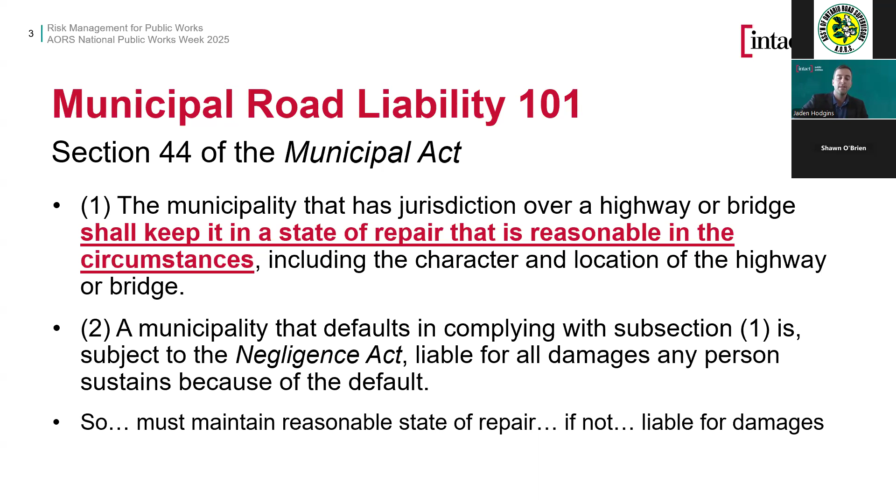So the next important item to address is what constitutes a reasonable state of repair. There's no simple definition - it depends on many factors. For a road, it depends on things like the location of the road, its history, its character, its traffic volume, whether it's paved or rural, its normal usage, and the resources available to the municipality. Additionally, when the courts are assessing whether a road is in a state of repair or not, they will look at all of the facts and evidence and information available in making that assessment and determination.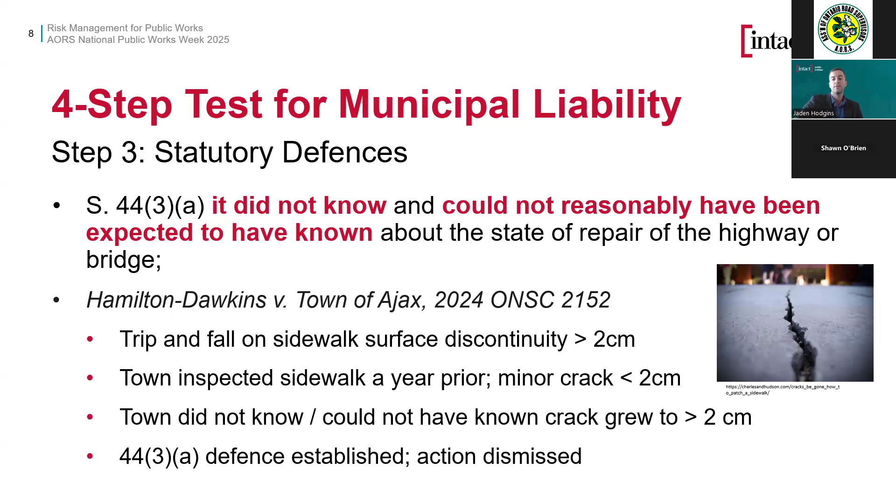They had done their annual inspection the year before and documented that it was in a state of repair, and they had not yet completed their annual inspections for this year. The trial judge agreed there was no evidence that showed the town knew or could reasonably have known about the trip ledge. Therefore, the trial judge confirmed the town established this defense and the action was dismissed.

Before moving on, just a couple other takeaways from this case. On the good side, the town of Ajax, they had an effective sidewalk inspection program.

Their supervisor of operations testified in court regarding the town's inspection procedure, explaining they hired summer students to walk all the sidewalks annually using GPS units, and the students would record 3 categories of surface discontinuities: 0 to 6, 6 to 19, and 19 millimeters. Any trip ledge greater than 19 millimeters was painted orange and logged for repair. So the sidewalk inspection program was generally adequate and provided the town with good records that they were able to use to defend the claim.

There were, however, a couple things the judge did not like. The first being that the town did not have a written policy for its sidewalk inspections, and they didn't have a written training program for its summer students. So this left the judge with some discomfort because the lack of policy and training program may suggest that the students may not have been doing the inspections properly.

The second thing is that following the trip and fall, the town went and repaired the sidewalk panel without documenting it, without taking photos. So the judge suggested that this effectively extinguished evidence that may have been used in litigation. But fortunately, given all of the factual circumstances, this was not significant and did not affect the outcome of the judge's decision.

And lastly, when considering the Section 44(3)(a) defense, the judge cautiously quoted another case which stated, 'A municipality should not readily benefit from its own failure to document or circulate complaints properly,' which means that a municipality cannot put its head in the sand or fail to document or ignore complaints. A complaint received means that the municipality has knowledge and therefore cannot rely on this defense.

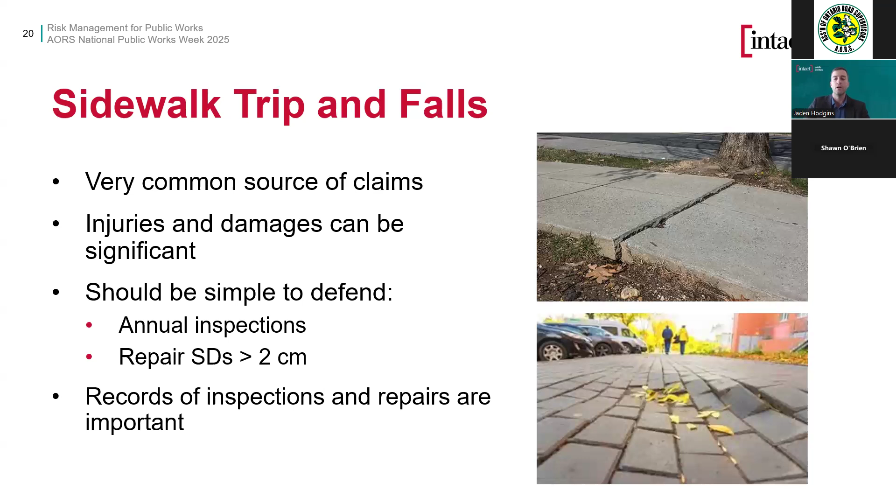We'll look at some applicable court cases dealing with these types of claims. First, a little bit of an older one, Bellefleur versus City of London. This happened back in October 2000, and the plaintiff was walking along the north shoulder of the street in the City of London. There were no sidewalks on the street, and the shoulder was routinely used by pedestrians. The plaintiff stepped into a large hole on the shoulder that was covered by autumn leaves, twisted her ankle, and fell. Damages for the injuries were agreed to be $12,000.

At this time in the year 2000, the MMS did not exist. However, the Municipal Act still had the other two defenses, being could not have reasonably known and took reasonable steps. Since the shoulder was commonly used by pedestrians due to there not being a sidewalk, the judge found that the standard of maintenance applicable to the shoulder approaches that of a sidewalk. So when considering state of non-repair, unfortunately, the city wasn't able to establish a defense, and they were found liable for having failed to maintain a reasonable system of inspection of the gravel shoulders.

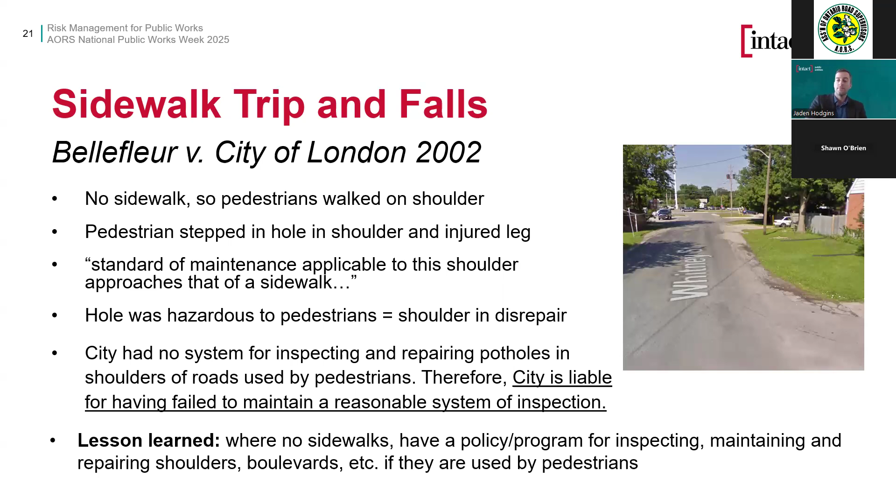The next case we're going to look at is Voisin versus County of Oxford, 2022. This case involves the trip and fall that occurred in the town of Otterville in Oxford County in August 2016. The main street running through this town was under construction, where 50 millimeters of surface course asphalt was milled out. The plaintiff was crossing the street at night when she tripped on the 50 millimeter milled edge, falling forward and breaking her arm. Damages for this case were agreed upon at $75,000.

The four-step test for liability was assessed. The first step is for the plaintiff to prove that the road was in a state of non-repair. There was a really detailed look from the plaintiff's legal counsel and the judge, examining all the facts including the construction contract, the Ontario Provincial Standards specifications, MMS, Ontario Traffic Manual Book 7, human factors evidence, and illumination. Ultimately, looking at all that information together, the judge concluded that the lack of ramping created a state of non-repair. In this case, they were not able to establish the defense.

In terms of contributory negligence, the plaintiff was assessed 35% contributory negligent due to the fact that she lived adjacent to the construction project, was aware of it, and should have been taking more care walking at night through the construction area. The county and contractor were found 65% at fault. Fortunately, the county had the proper insurance and indemnity clauses in its construction contract, so the contractor, or their insurer, was responsible for covering all costs associated with this.

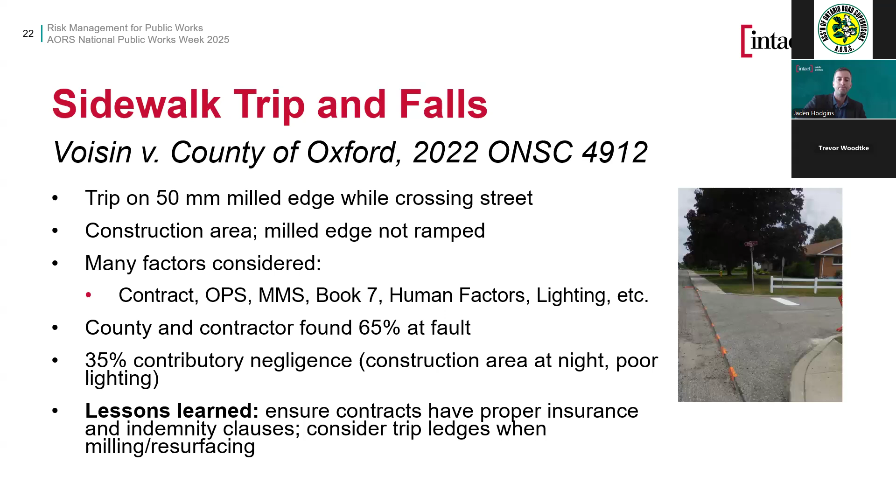One last one on sidewalk trip and falls. This one's an active claim, it's not gone to court. In this claim, the plaintiff allegedly fell forward over the sidewalk surface discontinuity, hit their head on the concrete sidewalk, temporarily losing consciousness. In the action they brought against the municipality, they're suing for $1.1 million.

Concussion, post-concussion symptoms, and psychological injuries can lead to these higher costs. The surface discontinuity was measured in 3 locations and ranged from 5 centimeters to 2.1 centimeters, so all exceeding the MMS threshold.

This one's unfortunate because the municipality had completed its annual sidewalk inspection per the MMS. They observed the surface discontinuity to exceed the 2 centimeter threshold. However, it was not repaired, so something fell through the cracks.

The lessons learned or takeaways from this claim are: one, that trip and fall claims can be significant, especially when head injuries occur. And two, you must follow up and ensure that your repairs are completed following inspections. Obviously, something went wrong in this case. Maybe there was a breakdown in the procedure between inspections and repairs.

So you need to review your whole sidewalk inspection program, from training to inspections to repairs, and ensure that it's working as intended. Lastly, spray paint surface discontinuities as soon as you become aware of them. Section 16.1, subsection 4 of the MMS says that treating a surface discontinuity includes alerting users' attention to the discontinuity, which can help reduce liability as well.

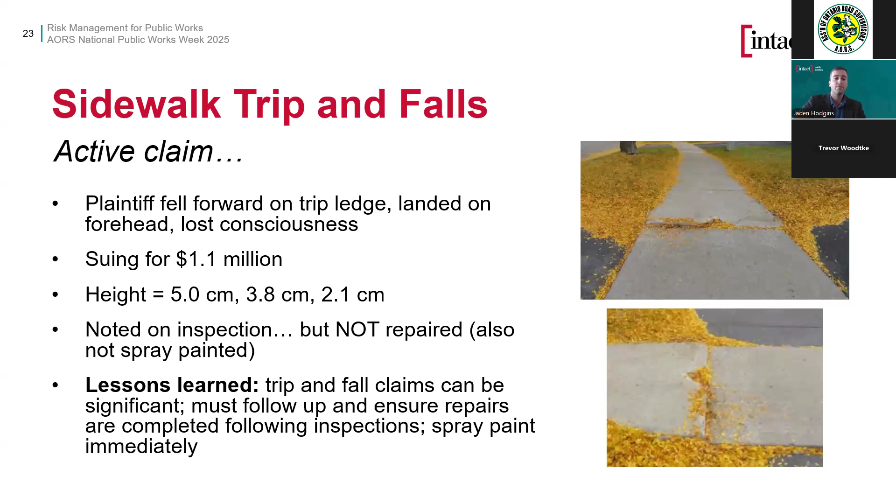Just a list of some takeaways on sidewalk trip and falls now. Firstly, by having a well-documented program of sidewalk inspection and repairs and following it, you're showing that you have due diligence and showing that you're meeting the MMS.

Secondly, in order for your inspection program to be effective, the inspectors need to be properly trained. They need to know how to measure surface discontinuities, how to document them, how to spray paint them, etc. You should also have your training materials documented, so that you can prove that your inspectors were properly trained how to inspect, like we saw in that Ajax case.

Use appropriate tools and methods for measuring surface discontinuities. In the past, IPE has typically recommended use of a combination square, and the procedure is outlined in one of our Center of Excellence articles you can find online.

As we learned from the Bellefleur v. City of London case, you should inspect and repair boulevards and shoulders where pedestrians are using them, similar to how you inspect and repair sidewalks. It's going to have a higher standard of maintenance.

Repair deficiencies within 14 days. That will ensure you're meeting the MMS deadline and that your sidewalks are never falling out of a state of repair. And warn the public of any potential hazards. So if your inspectors do find a surface discontinuity greater than 2 centimeters, spray paint it, put some barrels up, warn the public of the potential hazard.

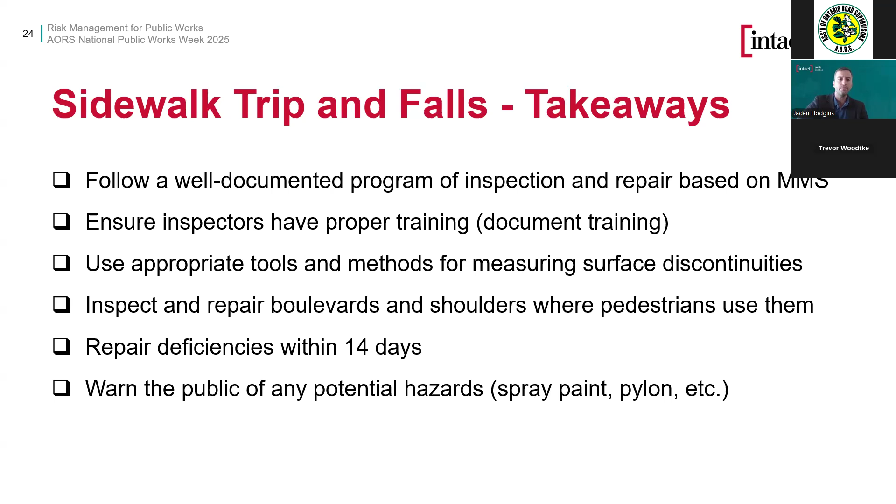Lots of great resources on Intact Public Entities Center of Excellence dealing with sidewalk trip and falls, so be sure to check those out. There's case studies, there's procedures, lots of good stuff.

Moving on to potholes. As most of you likely know, I think we're maybe out of pothole season now a little bit, or maybe you're still dealing with them, but potholes are a very common source of claims, especially in the early spring with the thawing of the ground and roads.

An important thing to keep in mind with potholes is motorcycles, scooters, bicycles, they're much more vulnerable than cars and trucks. A certain pothole that may just damage a vehicle can have really major impacts to a motorcyclist. You might crash into it or lose control. So you want to be sure that you have a good program of inspecting potholes through your routine road patrols, ensuring that hazardous conditions are not arising.

In terms of defending against pothole claims, the MMS is the most effective tool available to municipalities. If you can prove that you met the MMS in terms of potholes, then your roads are going to be deemed in a state of repair, and you have a full defense against claims. Again, in order to have that MMS proof, it's all about having proper documentation and records - well-documented patrol records and maintenance records.

You may have heard the statement before, municipalities are not insurers of road users against all vehicular damage. It's not reasonable to expect municipalities to maintain their roads in a perfect pothole-free condition.

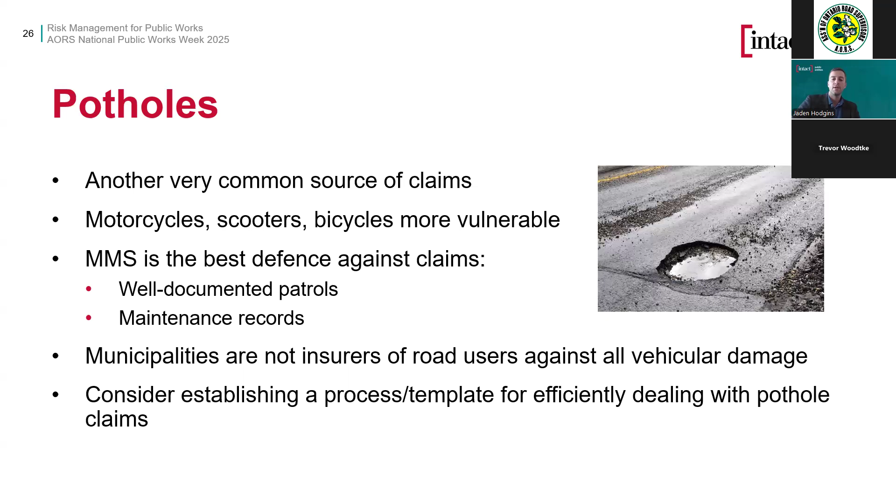Looking at the maintenance standards for potholes in the MMS, there's a definition there within the MMS, and additionally in section 6 of the MMS it notes that the surface area of a pothole does not include any area that's merely depressed and not yet fully broken through the surface of the roadway. So it's an important distinction there.

There's 3 tables in the MMS for potholes in paved roads, potholes in non-paved roads, and potholes in shoulders. This table here on the left is table 1 for paved roads. The deeming provision in the MMS states that if the surface area or the depth is less than in the table, then the pothole is deemed in a state of repair, which we know means no liability. So only when both the surface area and the depth meet the table will a pothole be considered in a state of non-repair, and that's once the deadline passes after you become aware of it.

As previously mentioned, the most important thing about being able to prove that you met the MMS with respect to potholes, and this proof should be shown in your patrol records, where you record when you patrolled the road and checked for potholes per the MMS. You need to ensure that you're patrolling your roads at the necessary frequency per the MMS requirements, and you should also ensure that your patrol staff are properly trained on how to inspect potholes per the MMS standards.

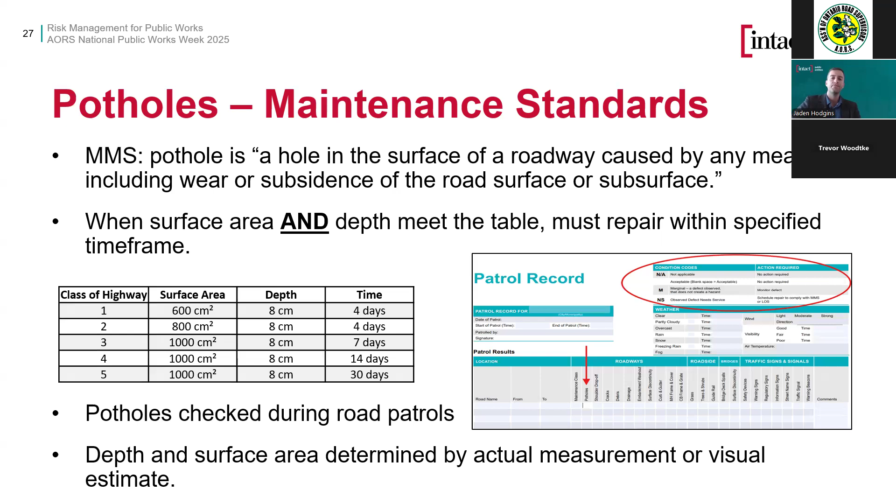You should measure potholes to confirm whether they meet the tables in the MMS. Although the MMS does allow you to perform a visual estimate to determine the surface area and depth, it doesn't hurt to measure them from time to time just to get an idea of what those thresholds are.

Measuring potholes may be especially important when you do receive a claim. This should be done as soon as possible, and detailed records should be collected. The more information, the better. Take photos of measurements, holding the camera in line with the measurement.

Also, when a claim is received, you should gather as much information as possible from the person making the claim. This may be done by an internal staff person at your municipality or an insurance adjuster, but you want to ensure you're getting the date, time, direction of travel, type of vehicle, nature of the damage, etc. If it's found to be a valid claim, then you'll have to gather all of your records to assess whether you have a proper MMS defense.

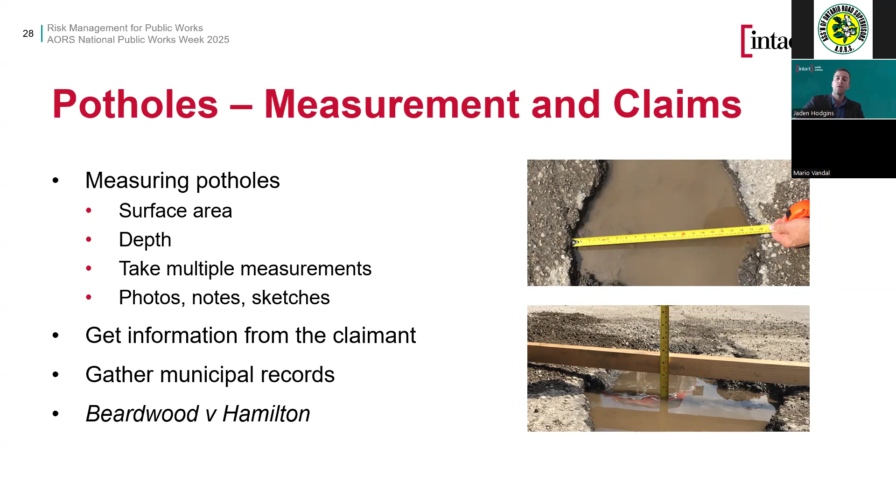Repair potholes proactively. You should have a program of inspecting and repairing potholes regularly. You shouldn't wait till they reach the dimensions in the MMS — potholes should be repaired earlier and more proactively.

When you find a pothole that meets the MMS dimensions, ensure that it's repaired within those specified timelines to avoid potential liability. Be sure to have documentation or records showing when it was inspected and when it was repaired. We briefly went over some pointers for measuring potholes — ensure that when you do have to measure a pothole, you measure carefully and create good records of those measurements, including photos. Lastly, because pothole claims are so common, consider establishing a process for dealing with complaints and claims efficiently.

All right, next topic I want to discuss is traffic signs and pavement markings. From the insurance and claims side of things, it's very common to see traffic signs and pavement markings closely reviewed and scrutinized when dealing with motor vehicle collision claims. The courts have determined that municipalities have a duty to install warning signs for hazards and unexpected and potentially dangerous conditions. This aligns with what we previously covered regarding reasonable state of repair, which is essentially protecting road users from unreasonable risk of harm.

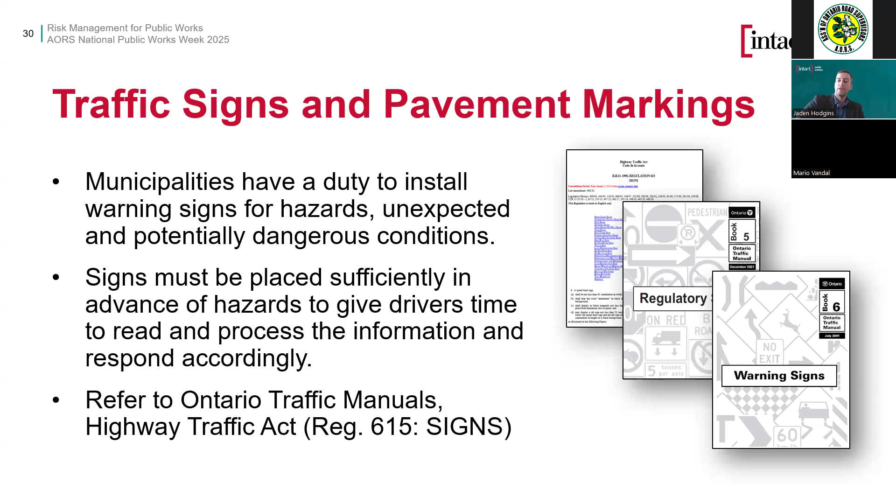When determining which signs to use and how to use them here in Ontario, we commonly refer to the Ontario Traffic Manuals, especially Book 5 and Book 6, the regulatory signs and warning signs. Another important reference is Regulation 615 for signs made under the Highway Traffic Act.

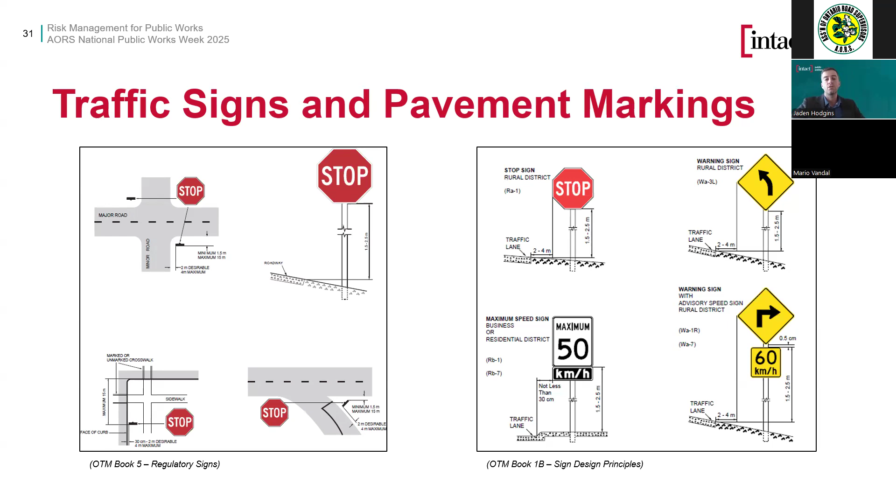These are just some examples of those Ontario Traffic Manuals. The one on the left shows typical stop sign layouts from Book 5. The one on the right shows height and offset locations for signs in general from OTM Book 1B. It's very important to ensure your signs are properly installed in accordance with these manuals, as we'll discuss next, since when motor vehicle collision claims arise, these things are scrutinized in great detail.

When a crash occurs and the plaintiff is launching a claim or action against a municipality, it's very common that they will hire an engineering expert to support their case. This expert will review the road condition in great detail, including things like the geometric design and traffic signs.

They'll also review pavement markings, pavement condition, sight lines, sight distances, etc. The engineering expert will prepare a report for the plaintiff summarizing the conditions, and any deficiencies in those features will be highlighted. The plaintiff or their legal counsel will use these deficiencies against the municipality to strengthen their case.

They may argue that the missing sign or the incorrectly placed sign contributed to the plaintiff's crash, or that it constituted a state of non-repair of the road. This is another reason why it's so important to ensure that your traffic signs and pavement markings are installed in accordance with applicable standards like the OTM manuals, to reduce liability.

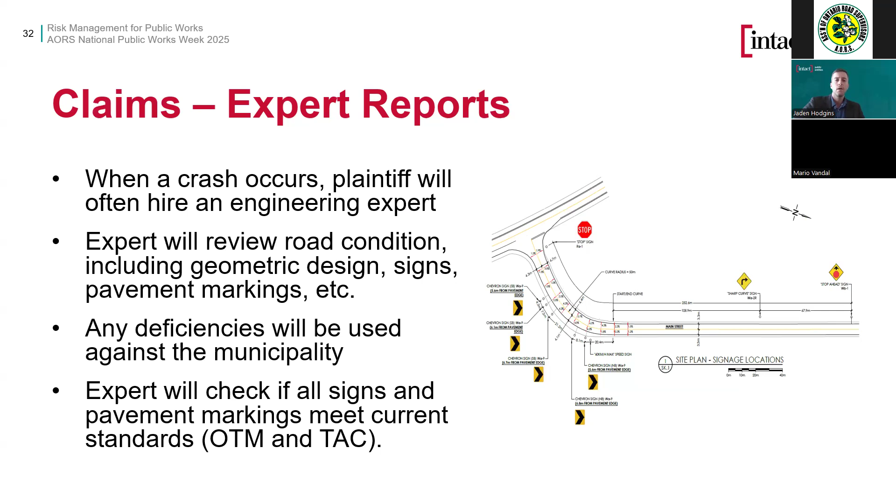Since crashes on curves are 3 times more common than on straight sections of road, it's important to verify that all your curve warning signs are correct.

The next two items I touched on a bit already. For advisory speed tabs for curves, it's important that they are accurate and correct based on the physics of the curve. This is normally determined through a drive-through ball bank indicator test. If the advisory speed is not correct or missing when it should have been there, it could potentially create liability issues when the plaintiff's expert does the analysis after a crash happened.

I've discussed the importance of having the sign sufficiently far enough ahead of the curve or hazard. This is all laid out in Ontario Traffic Manual Book 6.

Chevron signs and delineators are very commonly seen missing where they should be installed, or installed incorrectly, with either the spacing or the orientation being wrong. Again, Book 6 lays out the guidance for proper installation of these.

Pavement markings, edge lines: Ontario Traffic Manual Book 11 covers pavement markings. It states that edge lines are required 150 meters in advance of and around all curves having an advisory speed less than the posted speed limit. So it's quite common to see these missing on curves with advisory speeds.

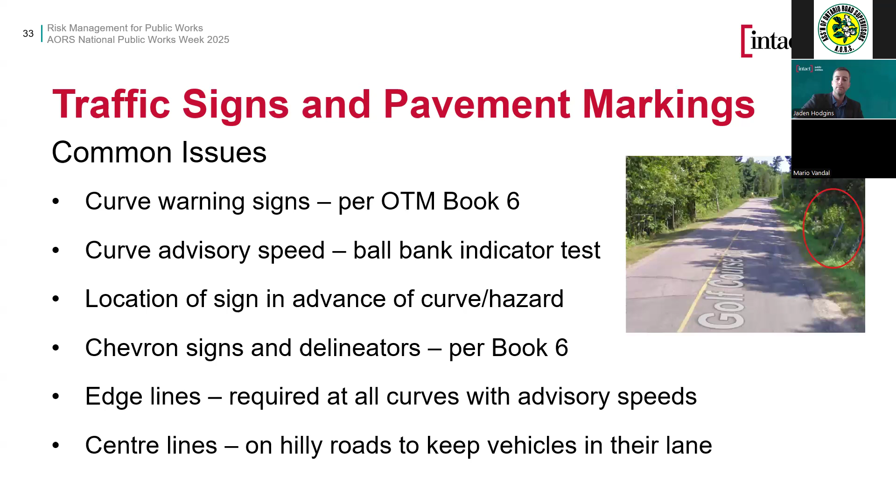This happened in 2007. A motor vehicle crash where a 16-year-old drove through a stop sign going 80 kilometers per hour in a rural area at night. On the other side of the intersection, there was a bend in the road and a concrete bridge, which the driver crashed into, suffering major injuries. He sued the municipality for failing to post warning signage on the other side of the intersection, warning of the bend - though obviously he should have stopped.

At trial, the judge found the municipality was 50% liable because rural drivers do not always obey stop signs, and the municipality ought to have known that. Fortunately, this case was appealed and the ruling was overturned, because municipalities should not have to maintain their roads to a level that protects negligent drivers.

This case was very important in establishing that when assessing state of repair for roads, they only have to be safe for ordinary, reasonable drivers - not those who blatantly disobey traffic laws and stop signs. So with warning signs, not every hazard has to be signed, just those that would put an ordinary, reasonable driver at risk. That's pretty important.

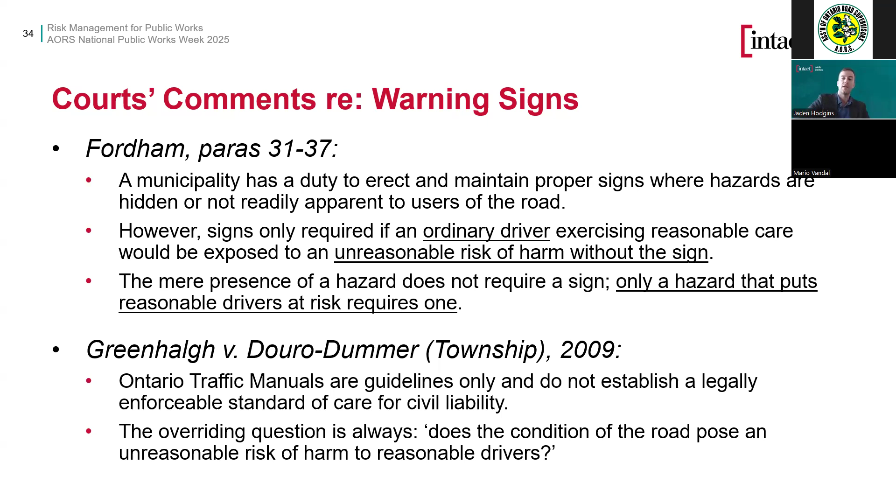So to wrap up signs and pavement markings with some takeaways: number one, review your signs and pavement markings, ensure they meet the Ontario traffic manuals. Focus on things like warning signs, advisory speed signs, sign location, height, offset. Ensure you have the proper distance for the sign in advance of the hazard. And for pavement markings, based on Book 11, check whether you have center lines and edge lines where they're warranted, areas like hills and curves.

Of course, inspect your signs for retroreflectivity annually per the MMS. And lastly, just a general note - do not oversign or install non-standard signs. Avoid clutter.

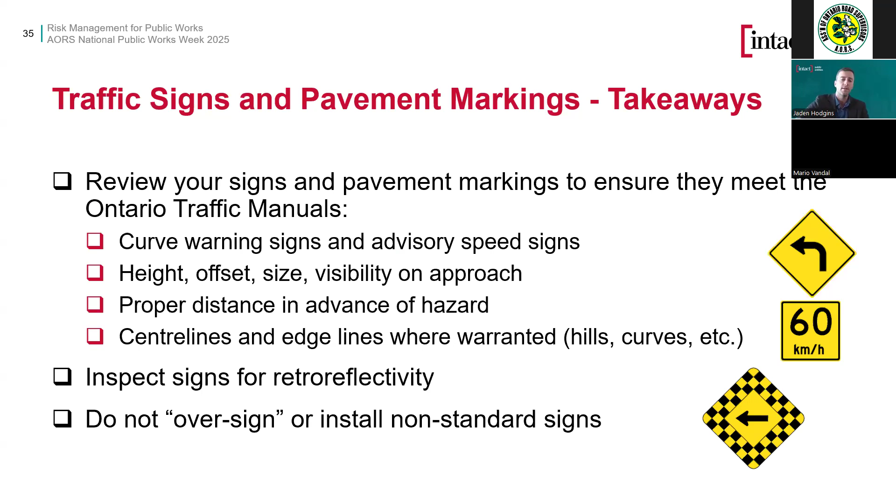Moving on to road design. In Canada, we typically reference the Transportation Association of Canada's Geometric Design Guide for Canadian Roads in our road design standards and best practices. This design guide is made up of 11 chapters and covers everything - I'm not going to list it because it's very comprehensive. When we see engineering experts get involved to analyze whether an existing road is up to current standard, this is often what they'll reference. The things we're going to focus on today are horizontal alignment, vertical alignment, and shoulders.

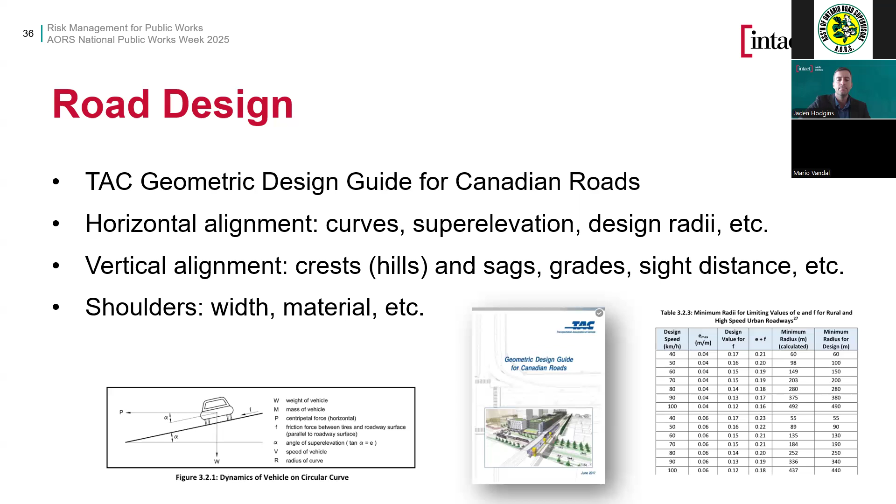So the first item of road design: horizontal curves, or simply, curves in roads. It's important to consider road design for curves because crash rates are 3 times higher on curves than straight sections of road, and runoff-road crashes are 4 times higher on curves. Additionally, more than 25% of fatal crashes are associated with horizontal curves, and the vast majority of these are roadway departures or run-off-the-road crashes.

From a human factors lens, curves are more visually demanding for drivers, and this has been proven by studies of driver eye movements. When driving on a straight section, you maintain lane position by looking straight ahead and using peripheral vision to detect lane markings. On a curve, the current position and the future position are visually separated, so drivers are looking at both locations. This increases visual demand, adding complexity and difficulty to the task of driving, making driver errors more likely.

If we go back to that TAC design guide, there are design criteria for curve radii based on design speed. Obviously, the faster the design speed, the larger the curve radius you need. To put that into perspective, an 80 km/h design speed requires a 250-meter curve radius.

Generally speaking, the tighter or smaller the radius, the greater the risk. As crashes happen and claims come up, it's not uncommon to see that there are many substandard curves out there on municipal roads in Ontario. Considering those two main factors, speed and radius, and recognizing that it's not simple or feasible to realign a curve or adjust the road layout, it's much easier to post advisory speed tabs or look at reducing speed limits.

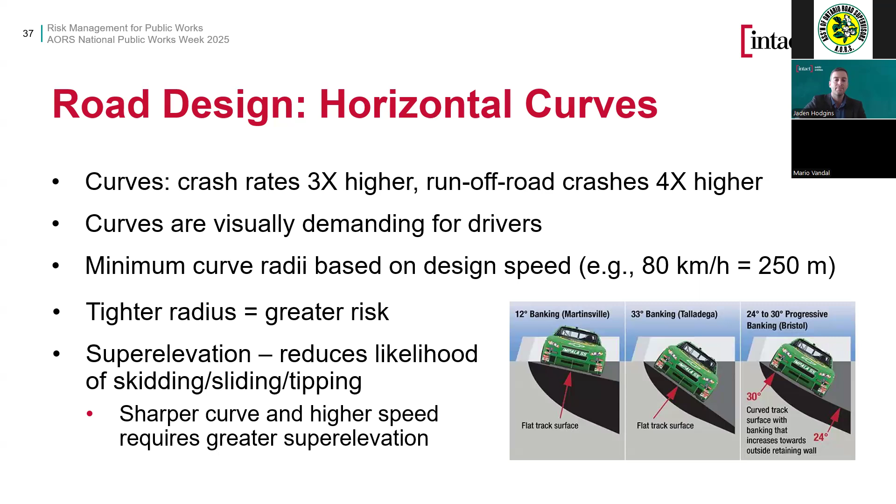A case here dealing with horizontal curves, Housen versus Nikolaisen. Very famous case, landmark case, not so much dealing with the curve details - it was more of a legal technicality that took it all the way to the Supreme Court. But we'll just focus on the curve issue.

So Mr. Housen and Mr. Nikolaisen had been out drinking the night before and the morning of the crash. While driving through a dangerous curve section of the road, the back end of the truck slid out. The driver lost control, the truck flipped in the air, landing on the passenger side, and Mr. Housen, the passenger, was left paralyzed.

When it went to trial, experts were involved to assess the road conditions, and they found that the road was a hazard to the public. It was also what they called a hidden hazard because the sharp curves were not readily apparent to drivers. There was limited sight distance due to uncleared brush, which blocked drivers' view of the upcoming sharp right turn, immediately followed by a sharp left turn.

The curve radius was surveyed to be 118 meters, whereas more like 250 was required. And the experts believed that the curve could really only be safely navigated at about 50 km/h.

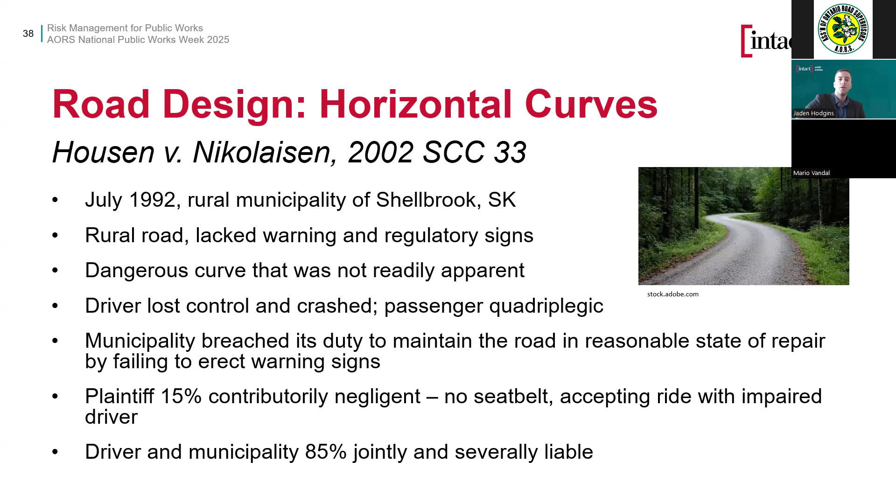So some takeaways for horizontal curves. Number one, recognize that curves are a higher risk location for your road network - those run-off-the-road crashes are 4 times more likely. Recognizing that run-off-the-road and roadway departure crashes are 4 times more common, you should closely review your roadside design in these locations for safety.

Are there fixed objects that may present hazards to vehicles that depart - utility poles, trees, etc.? Are there steep drop-offs that may warrant guardrail protection? We didn't cover roadside design or clear zones in this presentation, however these considerations go hand in hand with curves.

Review your sharp curves due to potential higher risks. Think about those less traveled roads as well, like those class 5, class 6 roads, like the one we saw in that Nikolaisen case. Drive those curves with attention, consider whether they may present hazards, and take steps to make them safer by installing warning signs or updating the speed advisory tabs.

Ensure warning signs are installed in accordance with Ontario Traffic Manual Book 6. Review the standards and review the signs in the field. Make it a part of your inspections, make a special project out of it, do a 2025 review of curve warning signs. Some common things to verify: are they installed in the proper location in advance of the hazards per Book 6? Are the advisory speed signs and tabs safe and realistic?

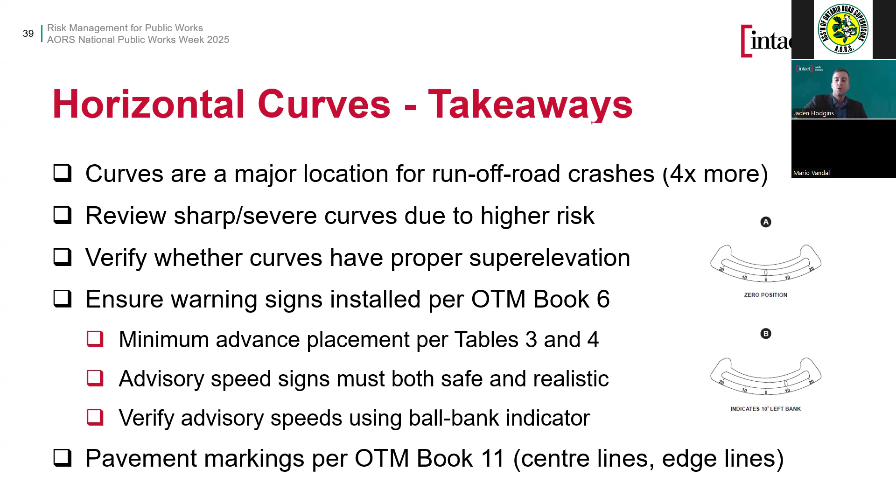Vertical curves, especially hills, also known as crest curves - visibility and sight distance are very important. Stopping sight distance is the distance the driver needs to be able to see to stop their vehicle before hitting an object or another vehicle. The most important factor for stopping sight distance is the vehicle speed. So the faster the vehicle, the more distance required to stop, the more the driver has to be able to see ahead. I've seen multiple claims and lawsuits where crashes occur at the crest of hills where sight distance is deficient. One car veers into the other lane, and due to the lack of sight distance, there's no time for either vehicle to react in time.

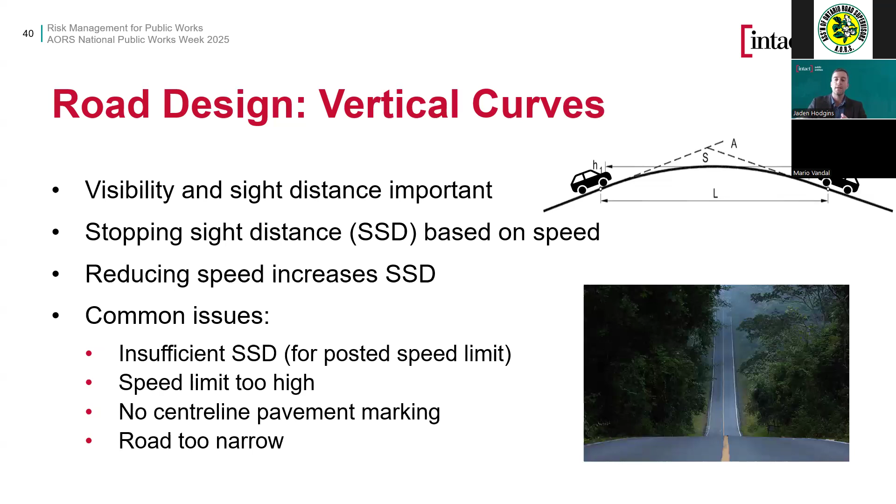Here's a case that happened in August 2004, another pretty famous case, when a vehicle driven by a 19-year-old woman with passengers lost control of her car on a hilly rural road. The crash happened at night when the road was unlit. She came to the crest of the hill and was momentarily blinded by the headlights of an oncoming vehicle, and she thought that the vehicle was coming right at her. So she veered to the right into a ditch. The car rolled and then hit a rock culvert. There were two sisters - one was driving - and they were both rendered quadriplegic in the case. The other passengers were injured as well.

This case went to trial in 2010, and the court apportioned liability one-third to the driver and two-thirds to Oshawa and Scugog Township. The judge concluded that the road was in a state of non-repair based on a series of factual findings that were supported by evidence. There was a dangerous deflection at the top of the road. It was unlit. The speed limit was too high given the sight distance deficiencies. There was no center line - you see the picture, there's a center line, but this is from Google Maps afterwards.

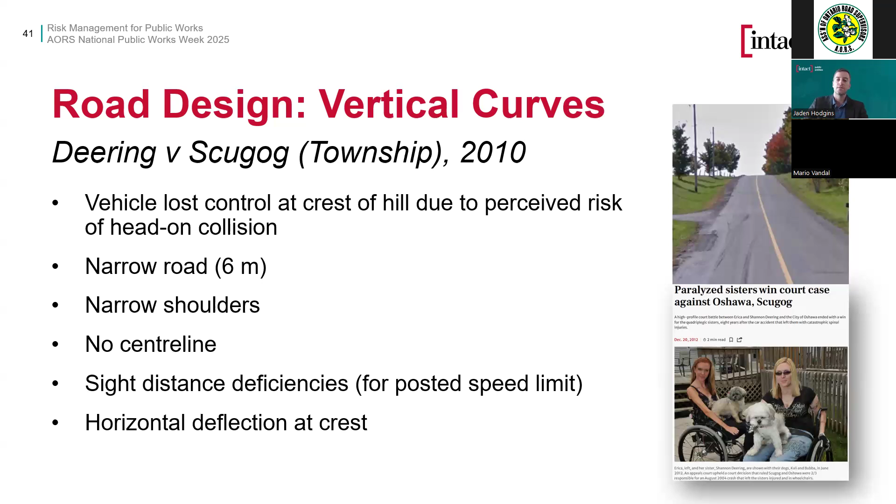So, a list of takeaways for vertical curves. Vertical curves with deficient sight distances are common. You may likely have some of these in your municipality, and they may represent a higher risk. So you may want to review these in more detail to see if any further review or design improvements may be warranted. Ontario Traffic Manual Book 11 specifies that yellow centerline pavement markings are required on vertical curves with stopping sight distances less than 150 meters. Roads with steep hills or rolling terrain may warrant speed limit reductions. In areas with narrow pavement widths and restricted sight distance, you can install keep right signs. Book 6 provides guidance on this.

Limited sight distance due to hills or rolling terrain may also warrant other warning signs, like school bus stop ahead, intersection ahead, and hidden dips. Again, book 6 is your reference.

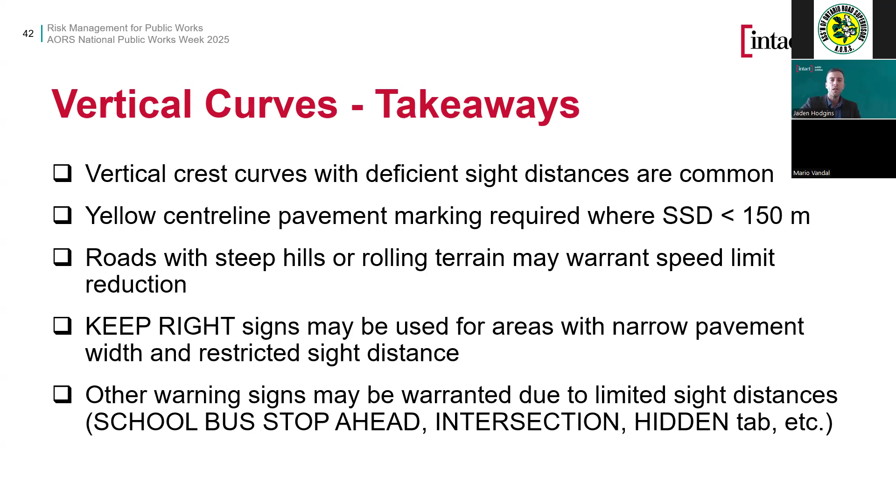Last topic I'm going to cover is road design shoulders. The purpose of road shoulders is to provide a recovery area for errant vehicles, a refuge area for stopped or disabled vehicles. They can be used by emergency or maintenance vehicles, and they provide lateral support for the roadway.

The TAC design guide has 3 categories for shoulders: paved, partially paved (usually half a meter in width), and gravel. An important consideration with gravel shoulders is shoulder drop-offs, which are included in the MMS. The maintenance standard for shoulder drop-offs is 8 centimeters deep for a continuous distance of 20 meters or more, which must be repaired in 4 to 30 days depending on the classification of highway. If the drop-off is less than 8 centimeters, it's deemed to be in a state of repair.

Edge drop-offs can lead to run-off-the-road crashes, and they're particularly dangerous on the inside of horizontal curves.

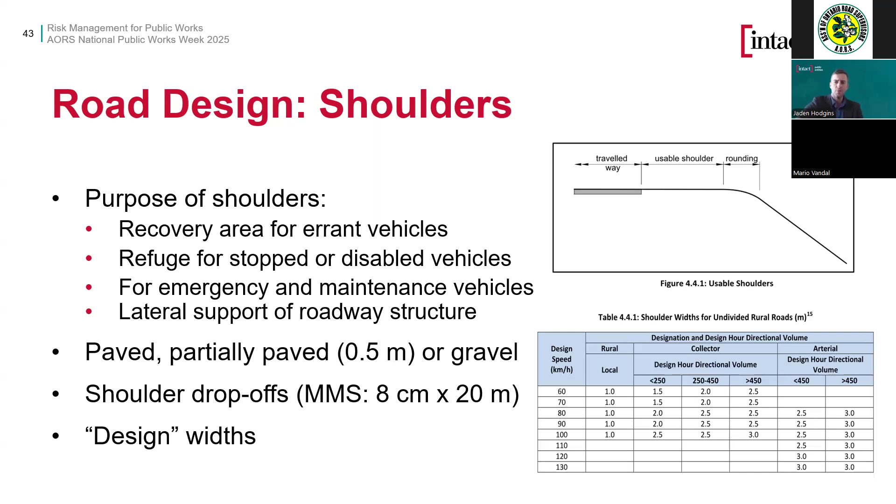Here's an example, a recent claim I came across. It's ongoing, but in this case there's a catch basin structure installed directly adjacent to the traveled portion of the road, in what may be considered the shoulder. The municipality didn't have a lot of information on this catch basin, other than that it was installed by the private property owner many years ago to drain their parking lot.

The municipality had no written record of providing consent or approval to install the catch basin, and they didn't undertake any inspections or maintenance of the structure. They did, however, permit it to remain adjacent to the road within the municipality's road allowance. This resulted in a steep drop-off, approximately 13 centimeters in height, from the paved portion of the road down to the catch basin frame.

What happened in this case is there was a person riding a motorcycle on the road. They allegedly came across a large stone or rock they had to swerve around, and then after maneuvering around the rock, they went to pull over on the side of the road and went right over this catch basin structure, lost control of the motorcycle, and crashed, with some pretty serious injuries. The outcome of this case is to be determined, still very early in the claim process.

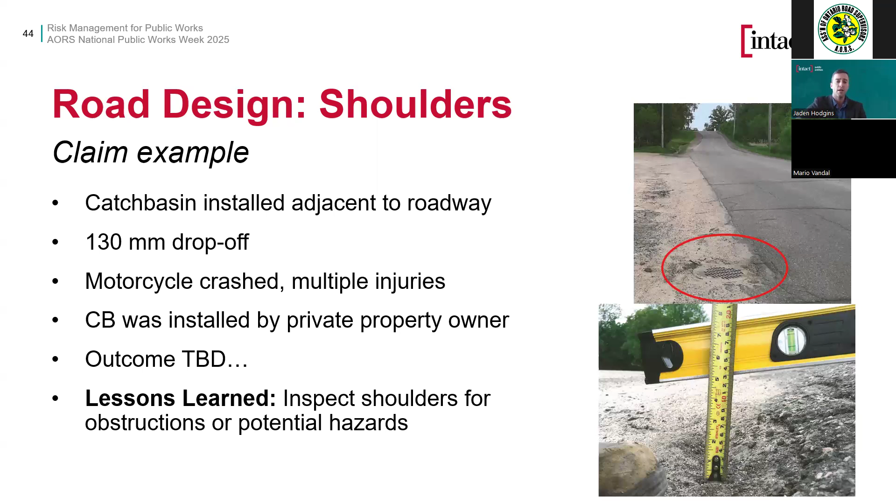A simple lesson learned here is: inspect your shoulders for obstructions and potential hazards, even long-standing things like this catch basin. Just because it's been there for a long time doesn't mean that it's safe or that it won't attract liability. Here's some takeaways for shoulders.

Be aware of those design widths and compare that to what you have out there on your roads. Maintenance is very important for shoulders. You should have a program of regularly inspecting and monitoring your shoulders as part of your patrols, and a regular program of maintenance. Shoulders are addressed within the MMS.

You've got shoulder drop-offs of 8 centimeters, and potholes in shoulders are also addressed. Again, during your road patrols, you should be monitoring for these conditions and ensuring that the shoulders are kept in a state of repair.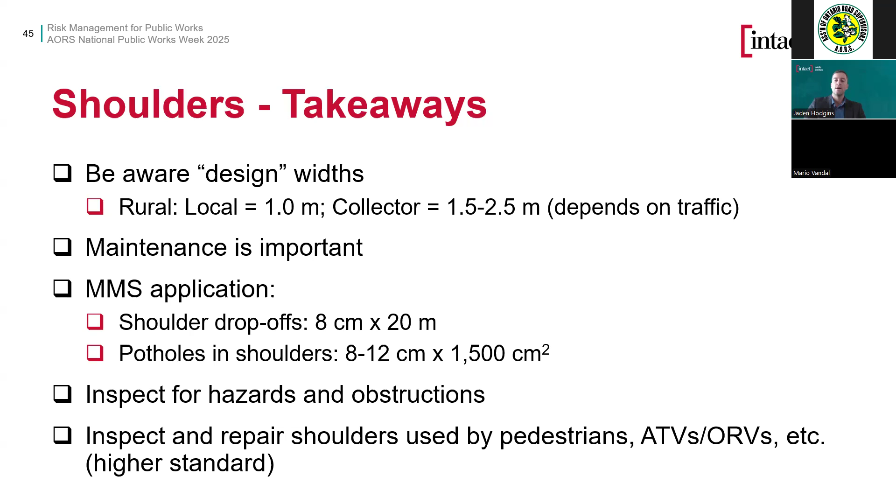Inspect shoulders for hazards and obstructions. We saw that example of the catch basin, things like this, as well as signs, posts, utility poles. These areas should be kept clear and free from obstructions or potential hazards. Lastly, inspect, monitor, and repair shoulders to a higher standard if they're commonly used by pedestrians, ATVs, or off-road vehicles. We saw that Bellfleur case where the judge held the shoulder to a higher standard, and the city wasn't inspecting it and maintaining it.

So we got through it all, not too far over time. There's just a quick recap of what we covered there. Oh, sorry, I do have more.

Not much though, just a couple extra additional general risk management best practices. Establish internal procedures that align with the MMS.

These show that your municipality acted reasonably and diligently to maintain your roads. Standardized procedures also set clear expectations for your team, ensuring that your public works staff know how inspections and documentation are to be done. Having the procedures is not enough on its own. You must also ensure that they're being followed through.

We saw that sidewalk trip and fall claim where it was inspected but never repaired. So as supervisors and managers, you need to ensure things are working as intended. Make sure employees have the appropriate training and understand internal procedures. This should be an ongoing process of training, supporting, and mentoring staff, always working towards continually improving your team.

Ensure proper documentation is being completed and retained. This may mean from time to time doing an audit, just checking on the documentation you are producing, making sure it's good quality and being done consistently.

Always use detailed contracts with proper indemnity and insurance clauses. Your insurer should be able to assist you with that and doing those contract reviews.

And lastly, when in doubt, reach out. Feel free to reach out to me anytime if you have any questions or you're uncertain about a matter dealing with road liability or risk management. Leverage those connections you make through your local AORS association and your neighboring municipalities. Connect with your local peers, share best practices. That's always great. Intact Public Entities, we're here to help.